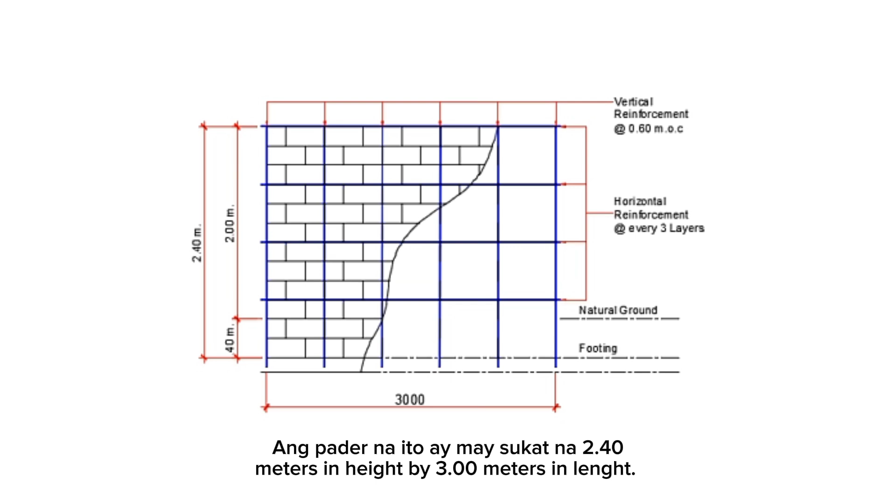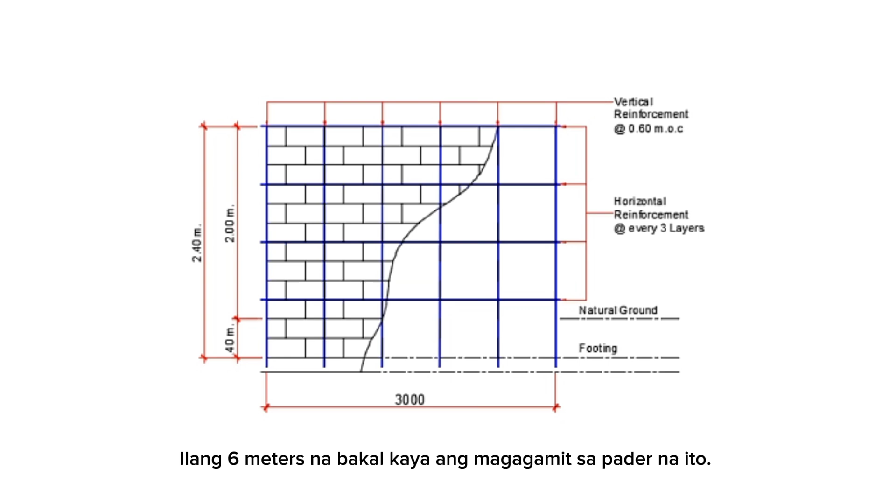Ang topic natin ngayon is about how to estimate rebars in CHB wall. Halimbawa, ang pader na ito ay may sukat na 2.4 meters in height by 3 meters in length, may vertical reinforcement na 0.60 meters on center at horizontal reinforcement at every 3 layers. Ilang 6 meters na bakal kaya ang magagamit sa pader na ito?

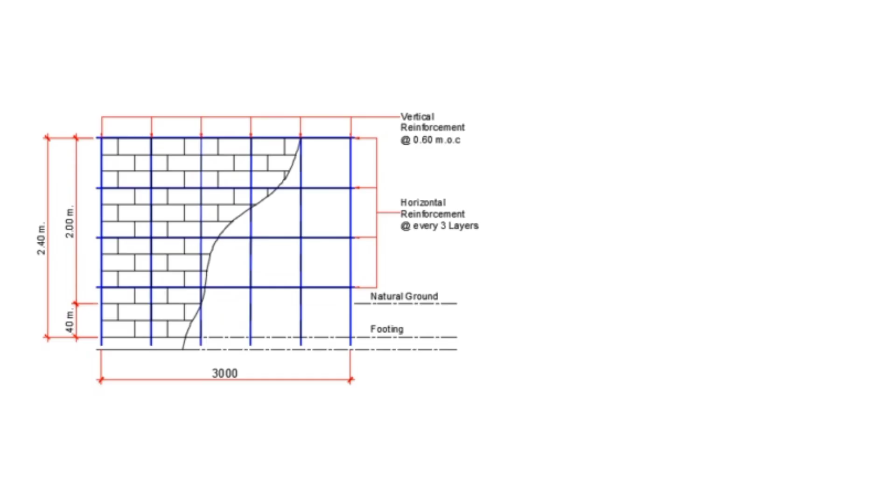First solution, per square meter method. Kunin natin ang area ng bakod. Area is equals to length times height. Area is equals to 3 times 2.4. Area is equals to 7.2 square meter.

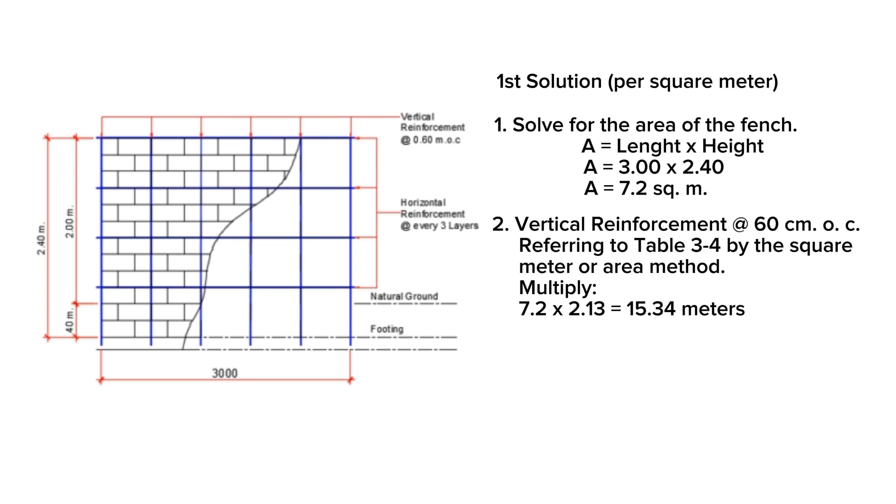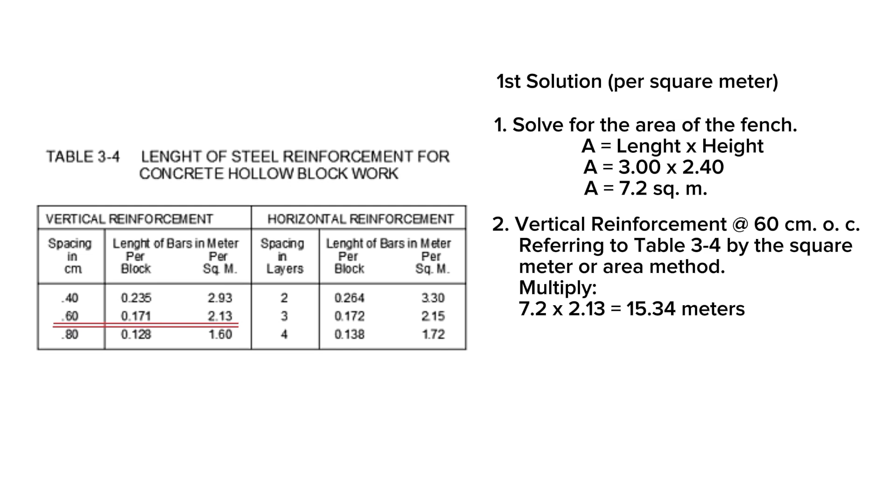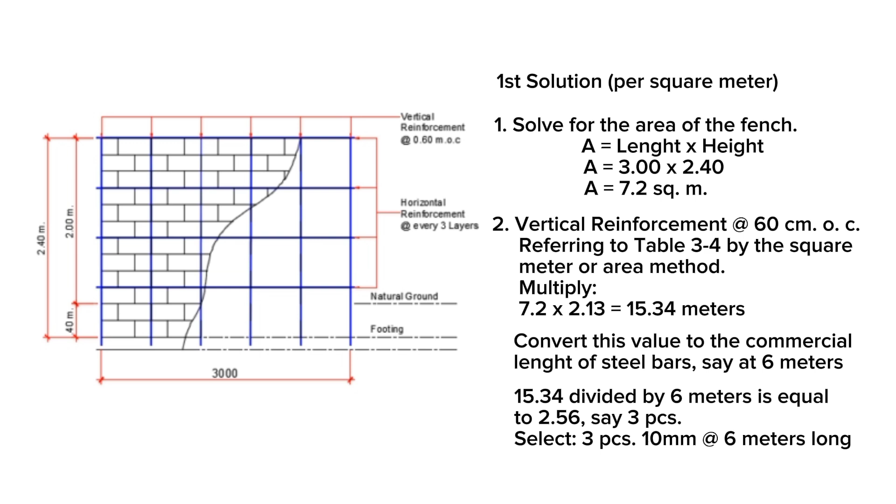Vertical reinforcement at 60 cm on center. Referring to table 3-4 by the square meter or area method. Multiply 7.2 times 2.13 is equal to 15.34 meters. Convert this value to the commercial length of steel bars, say at 6 meters. 15.34 divided by 6 meters is equal to 2.56, say 3 pieces. Select 3 pieces 10 mm at 6 meters long.

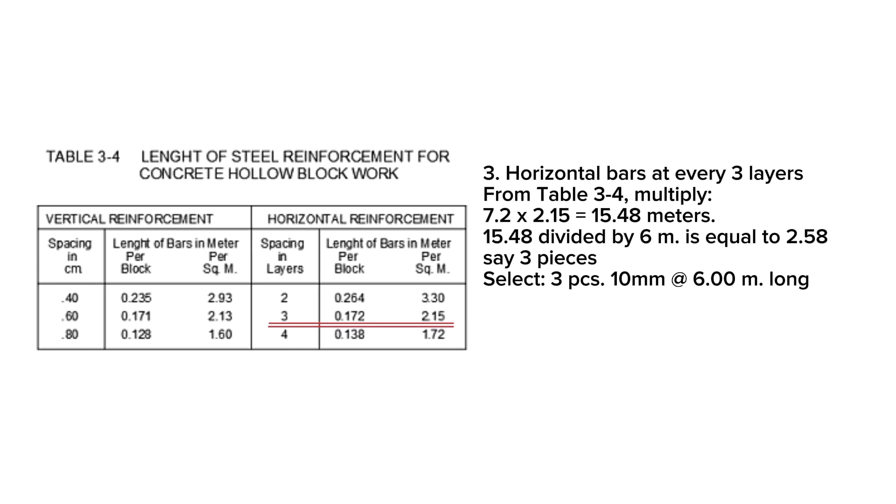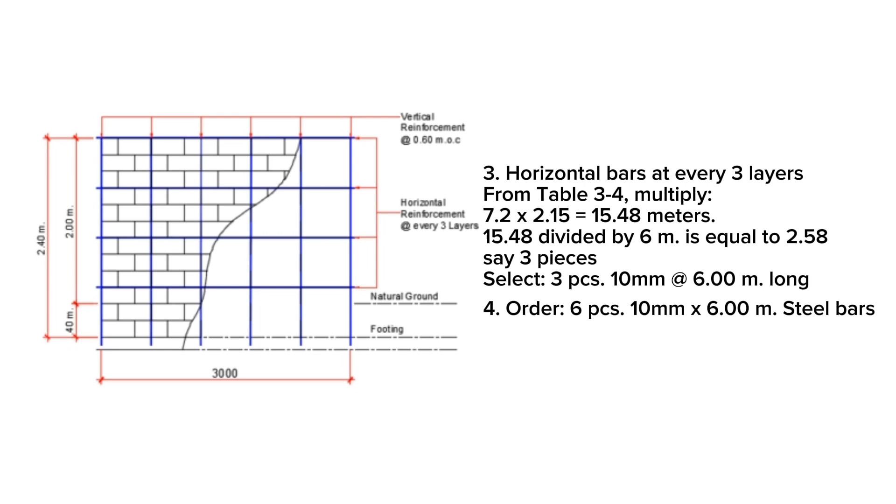Horizontal bars at every 3 layers from table 3-4. Multiply 7.2 times 2.15 is equals to 15.48 meters. 15.48 divided by 6 meters is equal to 2.58, say 3 pieces. Select 3 pieces 10 mm at 6 meters long. Now order 6 pieces na 10 mm by 6 meters steel bars.

Dumako naman tayo sa second solution na per block. Kunin ulit natin ang area ng pader. 3 times 2.4 is equal to 7.2 square meter. Determine the number of CHB. 7.2 times 12.5 is equal to 90 pieces.

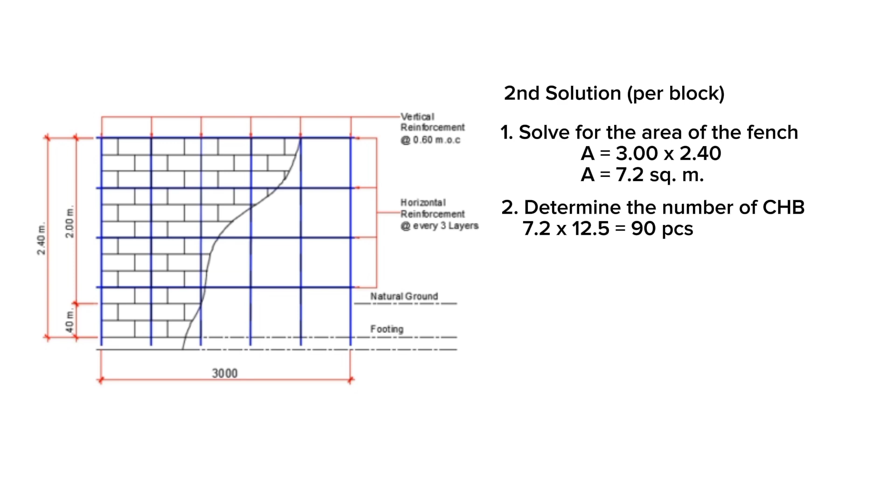Referring to table 3-4, vertical reinforcement per block at 0.60 meters on center. Multiply 90 times 0.171 is equals to 15.39 meters. 15.39 divided by 6 meters is equal to 2.56, say 3 pieces. Select 3 pieces 10 mm by 6 meters long.

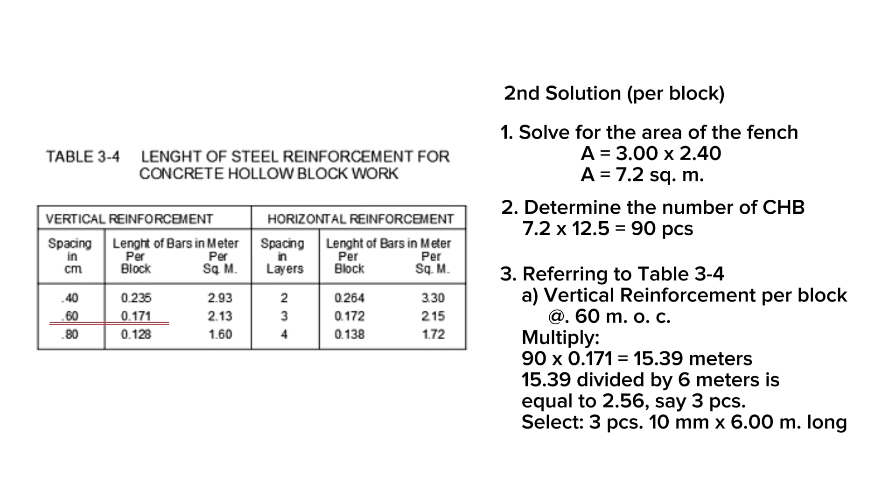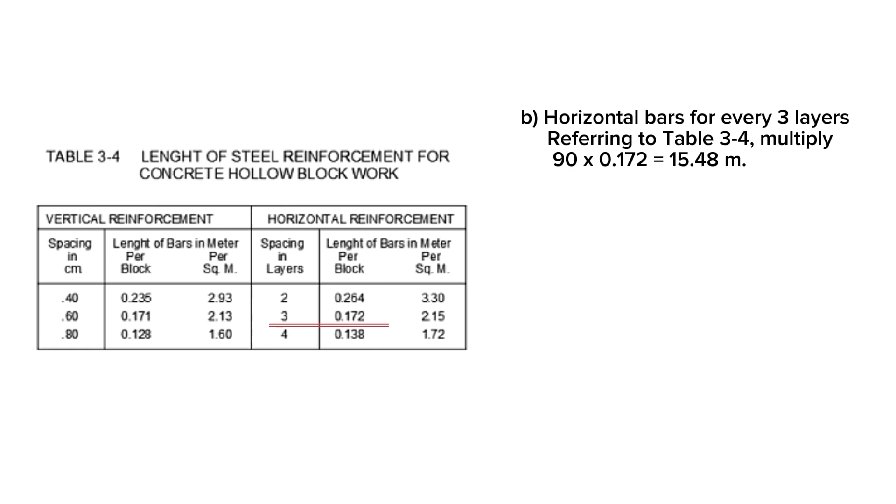Horizontal bars for every 3 layers. Referring to table 3-4, multiply 90 times 0.172 is equals to 15.48 meters. Convert to commercial length. 15.48 meters divided by 6 meters is equal to 2.58, say 3 pieces. Select 3 pieces 10 mm by 6 meters long. Now order 6 pieces 10 mm by 6 meters steel bars.